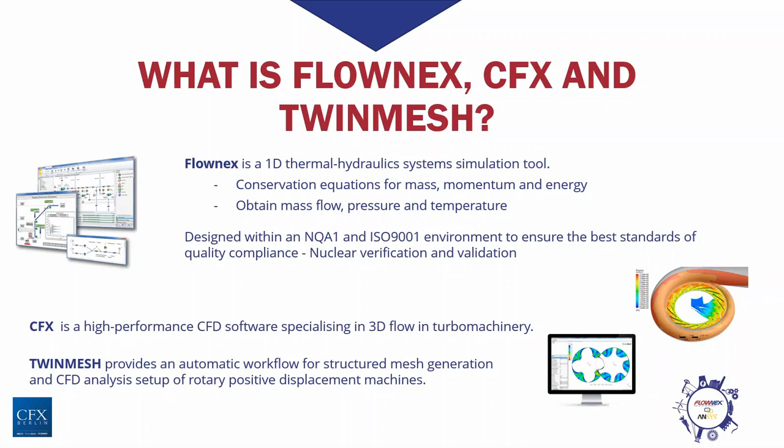Thank you, Willy. And also, Andreas, your overview of Ansys CFX and TwinMesh. Ansys CFX is the three-dimensional CFD solver that specifically addresses complex flows such as one would typically encounter in turbo machinery. And TwinMesh provides an automatic workflow for structured mesh generation and the CFD analysis setup for rotary positive displacement machines.

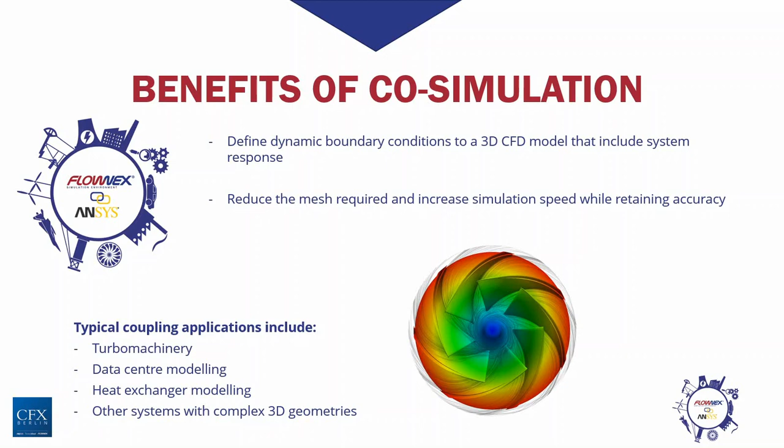Now, two benefits of using a co-simulation approach really stand out in the turbo machinery examples. The first is it is possible to define component boundary conditions better in the 3D CFD case, and this is done by dynamically obtaining boundary values from the 1D system and transferring it to the 3D model, instead of a static definition of the boundaries. Secondly, the co-simulation reduces the required mesh count, thereby saving time and also keeping accurate results. Significant improvement in solving time compared to modeling the whole system in full 3D.

The first of two applications that we will be looking at in this video is a vacuum vane pump. Willy, could you please give us a little bit of background on this type of pump? Sure, Marinos. A vacuum vane pump works through a rotating axis where the volume of the fluid is reduced and increased during a rotation. This causes a vacuum at the inlet and the pressure rise at the outlet. Furthermore, the rotation of the pump is generally above 2,500 revolutions per minute, so there is a significant number of pressure fluctuations over a short period of time.

This seems to be quite a complex component and also an ideal component to then be modeled in Ansys CFX, right, Andreas? That is correct, Marinos. Specifically, the complexity of the component and speed at which it rotates. Ansys CFX can model the component given a fine mesh and small time step sizes. In this investigation, we used a quasi 2D mesh to model the geometry of the pump.

Furthermore, as Willy explained, there are pressure fluctuations that propagate from the pump. The boundary conditions will be influenced by the pressure fluctuations and may not capture this effect correctly unless the system response is included in the model. So, Andreas, how can we include these system responses without increasing the mesh count and therefore increasing simulation time? Well, Willy, with co-simulation between the two codes, Ansys CFX and Flownex.

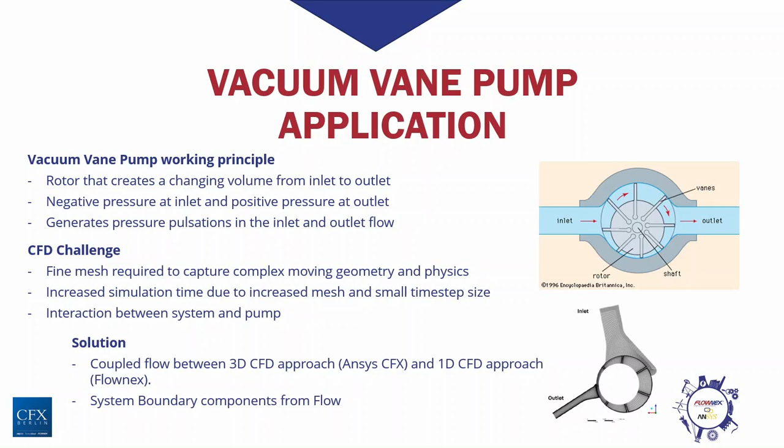So, to understand the co-simulation methodology, there is bidirectional information exchange between the Flownex and Ansys CFX solvers. Marinos, to further expand on the bidirectional information exchange, Flownex and Ansys CFX have seamless integration with a dedicated CFX component in the Flownex library. For this specific application, the upstream and downstream pipes were modeled in Flownex, where Flownex sends pressure and temperature boundary conditions to the inlet of the vane compressor, and CFX sends mass flow back to Flownex as well as a temperature at the positive mass flow boundary condition. Data is exchanged after each time step.

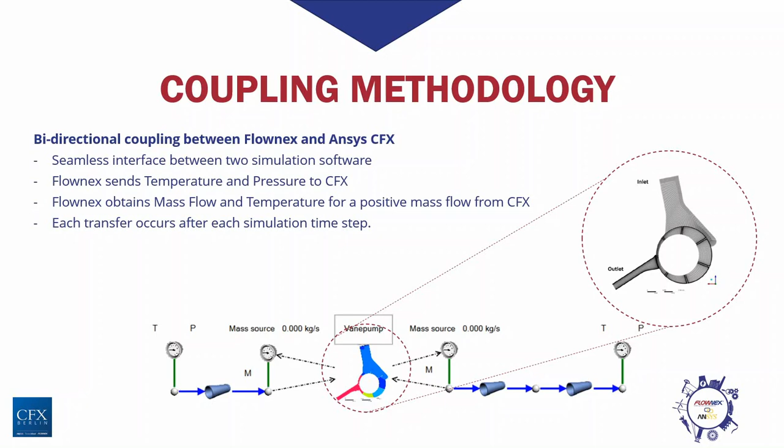Well, that seemed quite straightforward to set up. Andreas, we talked about the pressure fluctuations and pulsating flow. What are the physical effects on the simulation?

We looked at two scenarios where we have a coupled and uncoupled flow simulation. In the first uncoupled scenario, we can clearly see that there are high mass flow variations as rotation occurs. The standard static boundary conditions on Ansys CFX are reflecting pressure waves and causing high flow variations, often leading to standing waves between the machine and the boundary.

In the second scenario, we have the co-simulation between Flownex and CFX, where we can see that the fluctuations have leveled out and we can see a more realistic behavior from the pump. Depending on the boundary conditions at the Flownex boundaries, we might still have reflections there, but these are then of a physical nature and not purely numerical. This is very interesting, Andreas. I can definitely see the benefits of having system boundary conditions for a wide variety of applications.

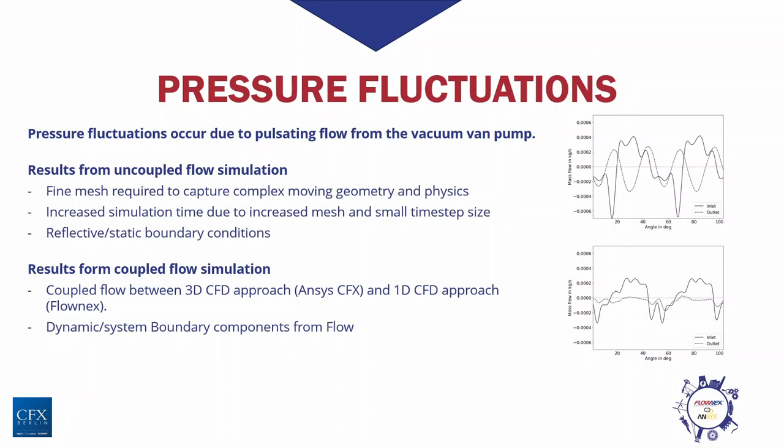Additionally, a test was performed where the pipes have been included in the CFX model. It could be found that without co-simulation, the time to convergence takes up to 30% longer compared to a co-simulation between the two codes. I can now imagine that with the fine mesh and the small time step size, any addition of more components such as valves or restrictors and even flow distribution downstream of the pump will have an adverse effect on the time of the simulation if co-simulation is not done.

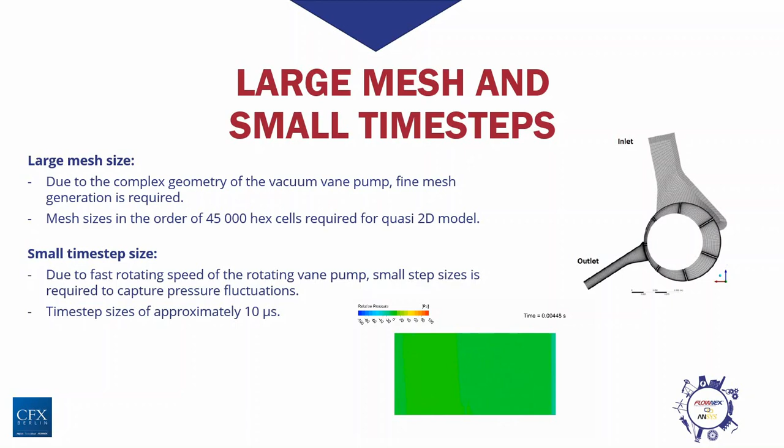Looking at the results from this successful co-simulation, we are able to not only reduce the mesh size and increase the speed of the simulation, but also provide more realistic and dynamic boundary conditions to the Ansys CFX component model. Furthermore, through co-simulation, we can now extend the system by including other flow components such as valves, flow resistances, and flow distribution to capture the effect of the system as a whole.

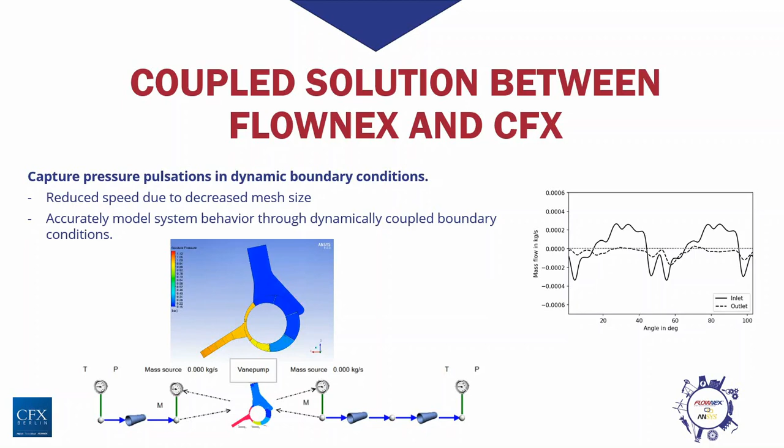Right, the second example we can now showcase in our co-simulation offering is that of a rotary screw compressor. Willy will provide us with a quick background on this specific application. The rotary screw compressor is another complex system where flow is being forced through the rotors. The compressor presents a complex geometry, which is an ideal simulation case for Ansys CFX, keeping in mind that a fine mesh and small time step sizes are required to accurately capture the fluid dynamics. To increase the complexity, we would like to include operational scenarios such as a valve opening on the downstream side of the compressor. Again, the solution is co-simulation between Flownex and Ansys CFX with additional Flownex components such as valves.

So Willy, just to expand on this specific application, co-simulation between Flownex and Ansys CFX provides the ideal environment to do virtual system prototyping of any system. That is correct, Marinos. Specifically, operational tests like this can be done, and component design can be done more effectively as the component is tested within a system environment.

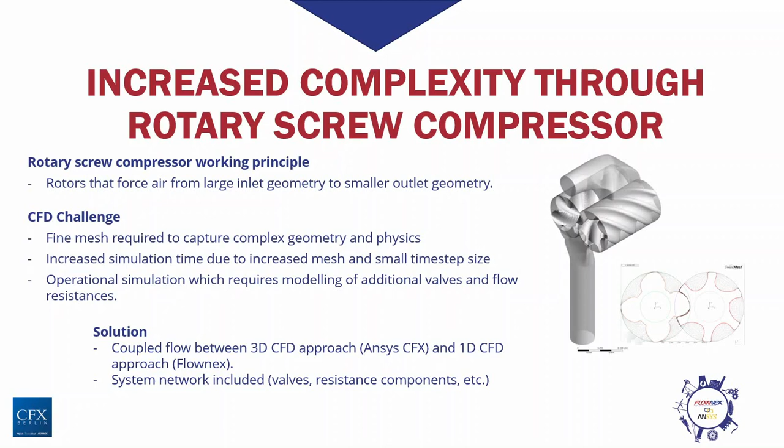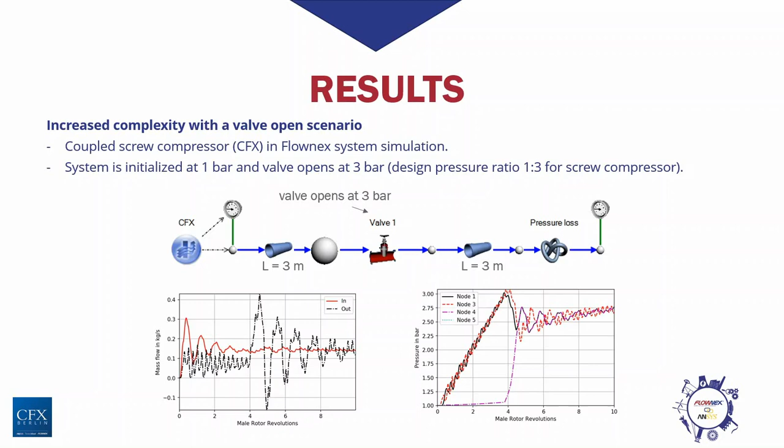I will take us through the results. We can see that the system initialized at 1 bar. After 4 rotations, the downstream pressure of the compressor reached 3 bar, at which the valve opened. A slight drop in pressure occurred, and fluctuations in pressure as well as mass flow could be observed when looking at each point in the system. Typical scenario testing like this can be performed with even more complex systems without an adverse effect on simulation time.

Thank you very much, Andreas and Willie. To conclude our co-simulation webinar for today, co-simulation provides a unique systems-level modeling solution where Ansys CFX and Flownex can couple easily and seamlessly. Yes, Marinus, this allows accurate simulation of complex component details in 3D with Ansys CFX, while modeling 1D flow and heat transfer, still with high fidelity in Flownex. Furthermore, you can include reduced order models in Flownex, obtained from Ansys CFX, to provide a digital twin environment for fast and accurate system simulation.

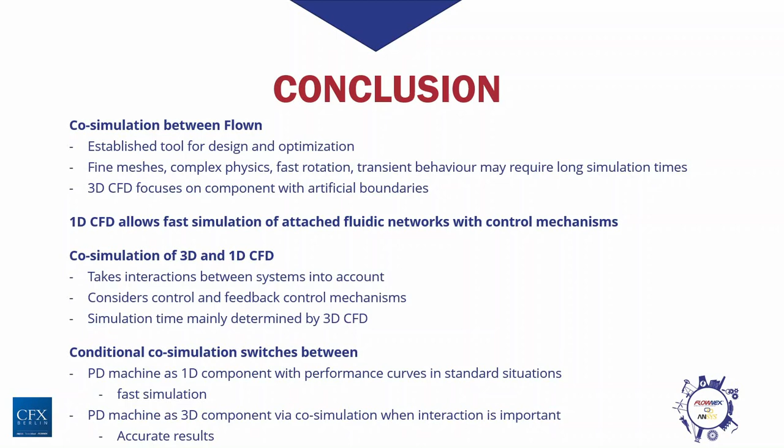The benefits of this capability are clear: reducing mesh sizes for the same system, thereby increasing simulation speed. Also, the dynamic effects of system boundary conditions are included, such as pressure waves, which enables the study of various scenarios, such as startups and shutdown events.